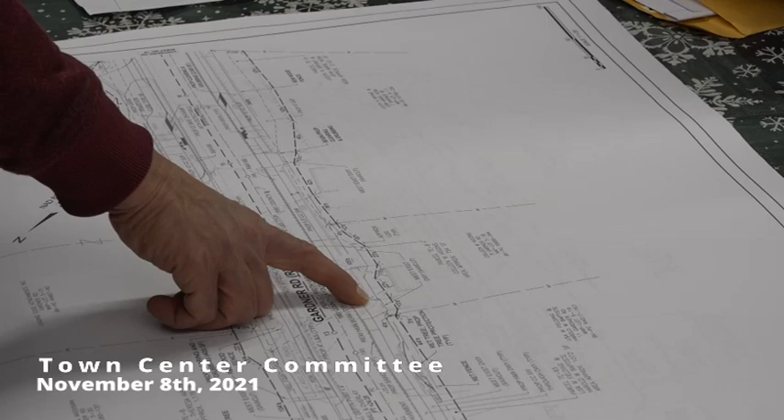This line is the limit that we would be reconstructing the driveway to. This side is a little bit less. Based on the scale of this plan, this is about 5 feet back from the driveway, so that's where that driveway would be constructed. Which means our new work would extend 5 feet into your property from the existing edge of the road.

Isn't much. But when you put a well in, you have to be so many feet away from the road. In this case, when I bought this house, the well was there already. My septic, I have a very small parcel, so they had to put it so many feet from the septic. But in this case, remember, the road is coming in away from your property.

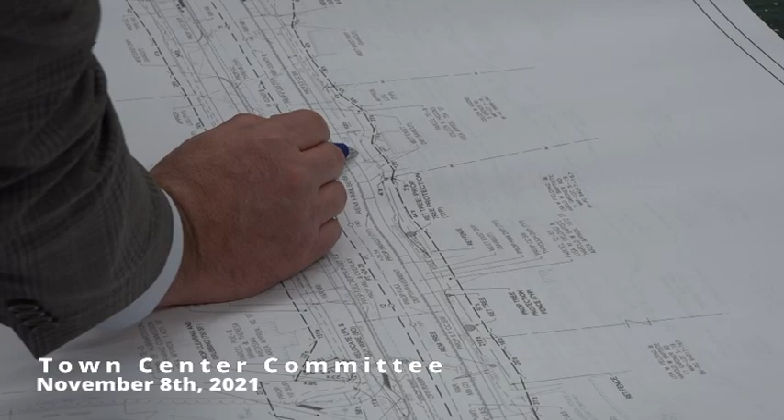The back of the sidewalk here is actually 5 feet into the road from the edge. So what we're talking about is impacts, but this is all your driveway. We're impacting it to reconstruct your driveway to here, but the actual new road is way beyond where it exists now. So we're actually bringing the road further away from the well, which hopefully is a good thing.

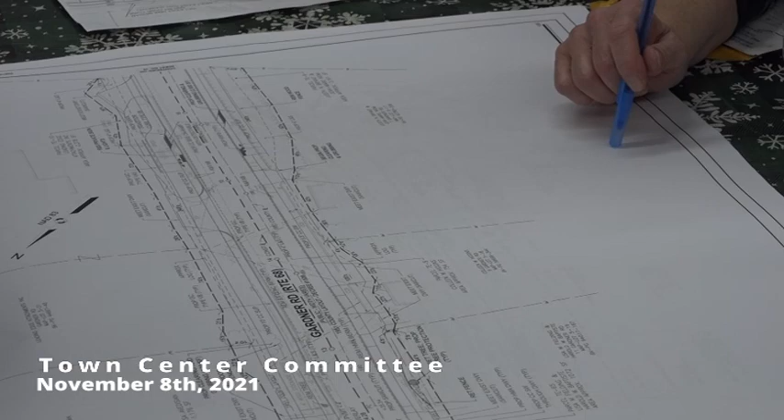Can't be bad. So the front of my house, I'm not going to really lose anything now? No, you're going to gain. My whole worry was, neither of us have much front yard, they have less than I do. My front door is actually on the side of my house, thank goodness, it's not on 68. I was just kind of worried how close that was going to be. Yes, you'll gain about 5 feet of green space.

So the sidewalk is actually going to be in front of their house and then go up, is that what you said? Starting way down there, on our side of the road? On your side of the road, yeah, the shared use path, it's really a wide sidewalk that bicyclists and pedestrians can use. That wide sidewalk comes up from Elm and Brigham to just in front of 7, and then it narrows beyond that to a 5.5-foot sidewalk the rest of the way.

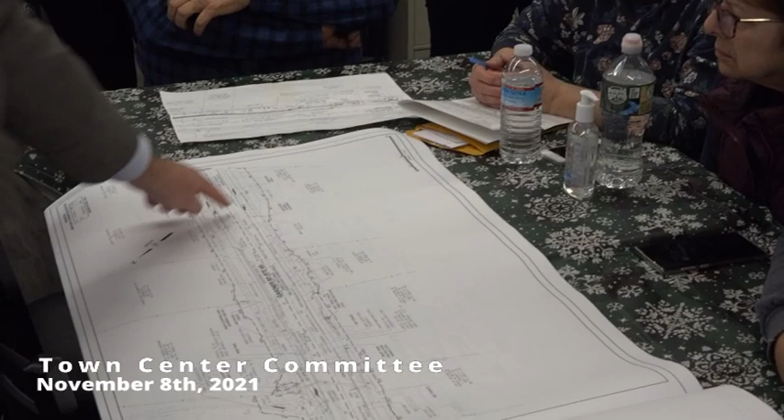And the 5.5 feet is because it has to allow for handicapped access, right? Yeah, that's just for pedestrians, the bicyclists aren't intended to use that narrow sidewalk. And where's the... right here. They only flash if someone wants to cross - they press the button, they flash for a relatively short period, allow them to cross. Oh, okay, so it's not like watching TV at night, there's going to be...

Not unless there's a lot of people walking. We talked a lot about that as a committee - do we get something that flashes every time a car passes or gets close? We thought that over time people would get fatigued and wouldn't pay attention anymore, like anything else, like smelling a farm - eventually you just forget about it. So the point is it only happens when somebody presses the button, so it makes more sense because people see it less, and it comes up into your view when you need to pay attention to it. It's a warning device.

It's not a stop, it's not a regulatory device.

So I have one more question. Last year we put in a gravel drive here. There's a driveway here and a driveway here, and then over here we had put a gravel driveway. But I did get a driveway permit from the town, so there is tar - they tarred it. So are they gonna, would they just... the curb opening is wider than this, so this is the proposed curb opening.

I'm not sure where that other driveway was, but we had it there - there's kind of a property line, so it's like from there, right, yeah, like right here. Would they be able to extend it? Because it's actually there, but we did it so we could get other vehicles out of the backyard.

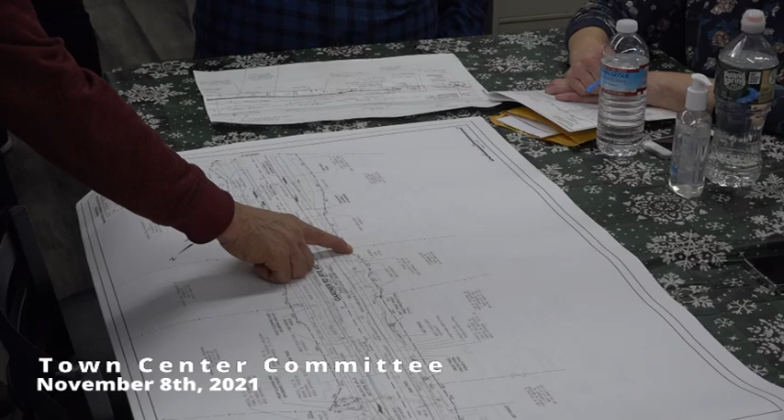Right, so that would actually stop here, and there'd be a portion of it that would be - is that grass? So where her paved area is here, it would be grass from here to here, and then a new sidewalk. So what you're saying is you'd want to extend the pavement further, and then cross the sidewalk to get onto the street, right? Yeah, but yeah.

Well, maybe I wouldn't need it, I don't know. The problem was we had trailers in the backyard that we needed to get out, so we had that put in. But it's pretty big, yeah, okay.

All right, no, I'm just wondering. Yeah, no, I hear you. I'm just looking at the plans myself, you know? I mean, we don't study these things either, you know?

That's why we're here. So we leave this with you and you're gonna take care of the extra curb cut? No, we have to apply to have that, to do it, a permit to do it, and then when they come to do construction, they'll see it's already widened, there's already a second driveway there.

The thing to remember, the goal is to have the plans perfect, basically locked in when it goes to construction, but there is some flexibility during construction - you could have a conversation with the resident engineer and say, you see what my driveway's doing here, it really needs to be 2 feet wider. They can adjust that in the field. We're trying to get it as close to locked in as we can before it goes down.

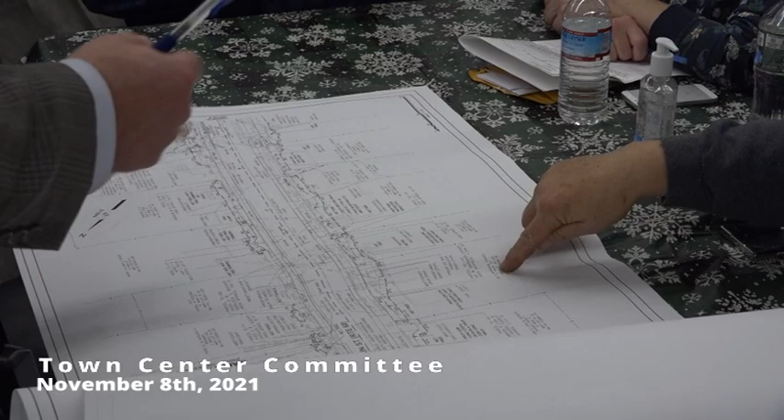Where are you at? 17. Do you have any questions? No, I've been listening to everybody, my questions are answered. Very good. Here, we got you, we got you.

So you see all here, there's the grass. Okay, so it's the gravel, the grass - there's no grass here in the final plan, right? It's the road, it's the parking, and then 10 feet to the side it's grass and then concrete walk. So there's curbing, grass, and then concrete walk. There is grass in here in the final plan - 5 feet of grass between the shared use path and the road is 5 feet.

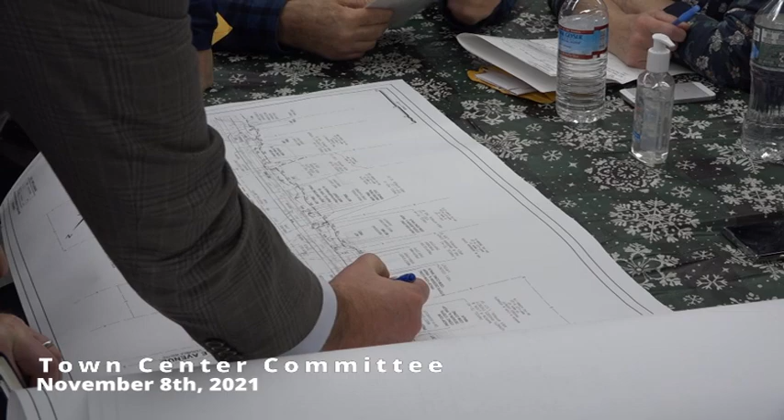I thought we voted it with no grass at all. No, we had to - MassDOT's comment was that we have to have it. Okay, so we voted something and they told us otherwise.

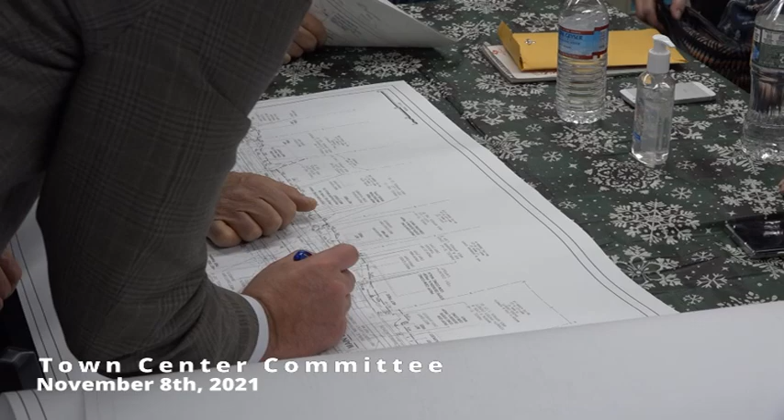I've got to get my stuff under the map. So where is the existing walk, and where is the future line? The existing back of walkway is about the same, but the walkway gets a lot wider.

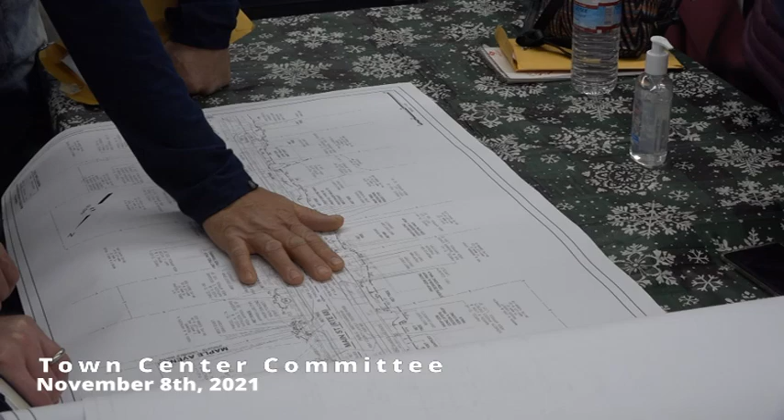But I think it'll be clear for everybody if you say this is the existing. What is this gravel here? This is not going to be gravel, that's existing, the grass here. So yeah, these labels are all, the lighter labels are existing.

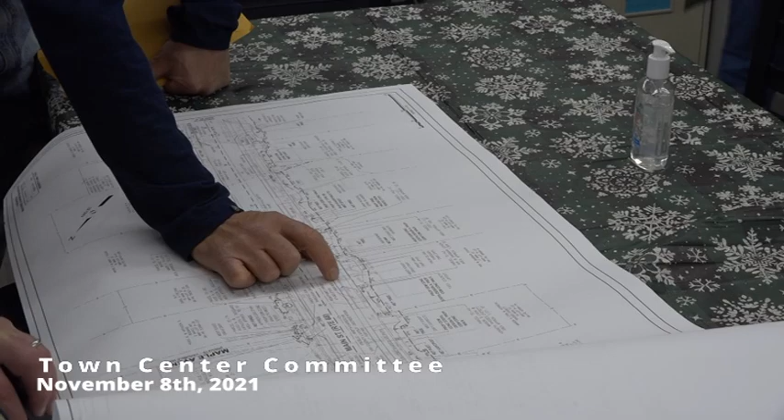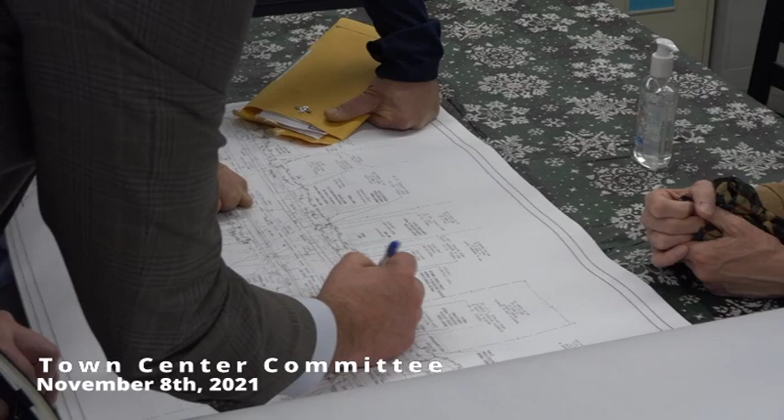The double line? Yes. And then this area is loam and seed, 4-inch loam and seed. So that would be between here and here, 4-inch thick loam and seed. And then back here, 10-foot cement concrete shared use path, so that's between.

When I'm really tired, I can see all these numbers cross my eyes. That's why we did this tonight. Many people had the same questions you did.

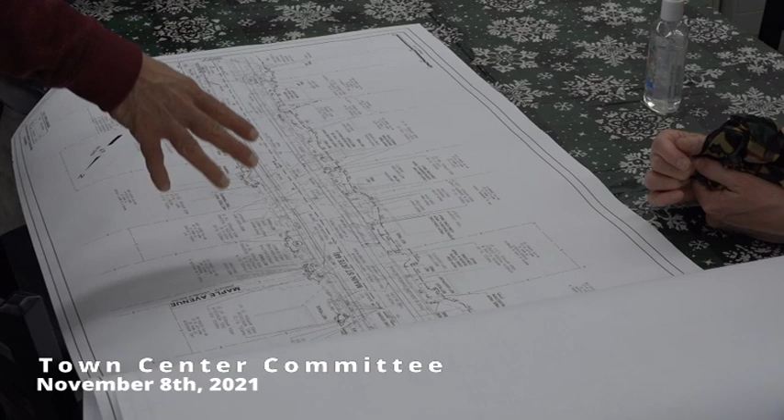I don't actually think what you said is a bad idea, but I don't think if we color coded it and wrote a bunch of notes on there, a lot of people would still understand. I think you need to be doing what you're doing with us now, which is, this is my house, what's going on in front of it, and all we have to do is show you 3 or 4 lines, and I think you kind of get it. Those 5 people just got it. So I think that's a beneficial thing of doing it tonight, because you can't, I still...

Now, even now that what Barbara, my wife, mentioned about our well is really close. I mean, it's our well around here. Yep, and this is...

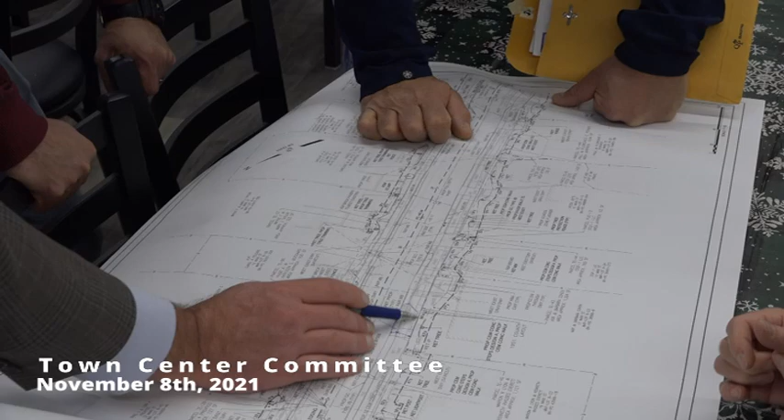Yeah, so again, this dash line here is the limit where we'll be putting new loam down and reseeding. There's not a significant grade change there because the back of walkway isn't really changing. But in order to tie the grade back in gently, we put new loam down and seed it, and then nothing from this line to that line. It's just that temporary easement.

So it feels to me like limited impacts, and I think the thing we ask people to do at times on things like this is put a stake out there painted orange of where your well is. That's the sort of thing that can be helpful, so that nothing happens to it that shouldn't. But it feels to me like what you just described in that area is very limited impacts.

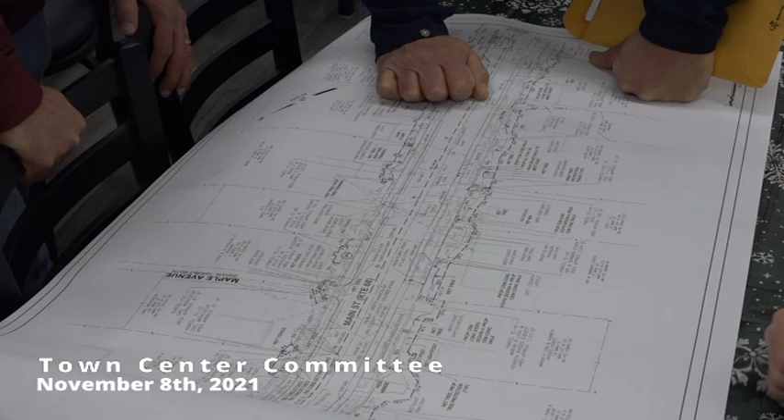So yeah, then it steps down from the back to your existing walkway, so you can access the shared use path. Will there be, during the construction period for this easement, will there be fencing put up there? Oh, no, there's no proposed fencing there. There's a short section of fencing between the tree and the work area. Oh, just to protect the tree? To protect the tree, correct.

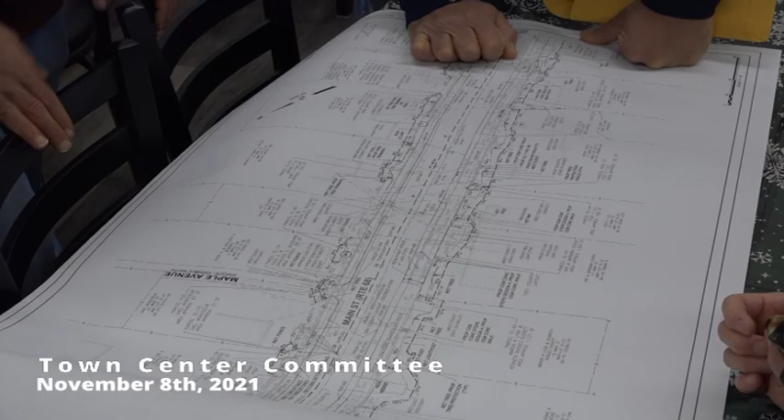But no, this project does not have that. You guys have seen, you've driven by projects before where maybe they have fencing, when everyone has a water line service, if they're ripping up water lines, everyone's got temporary water that's going along the road. Our project is much less impacted than sort of other ones like that.

It's going to be disruptive because it's going to be in front of your house, but you shouldn't be restricted on how you get in and out, besides a couple of very, very active days that are directly in front of your house.

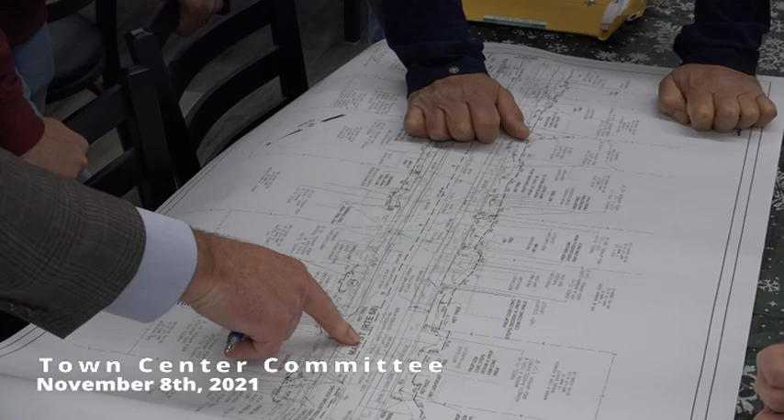And what's this gravel here? Existing, is that the driveway? So are you going to have access here, or is that going to be? This is a driveway cut, so it will be a driveway. Nia brought that up many months ago.

And then this is not in town center. I didn't say you did. I know the deal, it's all good. But it's the same comments that many people have had tonight. Yours is the first of... you were basically a trendsetter, because a lot of these are going to be going in. I can tell from the conversations here. And it's still fine, it's in the plans. No, I'm talking about the still.

Yeah, there are considerations that need to be made. These guys looked at what we had talked about, you as a private citizen sort of coming in. One discussion we had, maybe before you walked over, is there's a bike lane that goes down a portion that has to cross back over. If the extension of a driveway needs to go in a spot where it crosses the bike lane, maybe it can't. So it's not always a yes. But that's the sort of thing we have to have a conversation with each property about. But that's not everywhere, it's not like we're crossing all over the place.

Right, okay, so the double line is the curb. That's the edge of the sidewalk on that side. Yeah, that's the curb on the road. No, I got it.

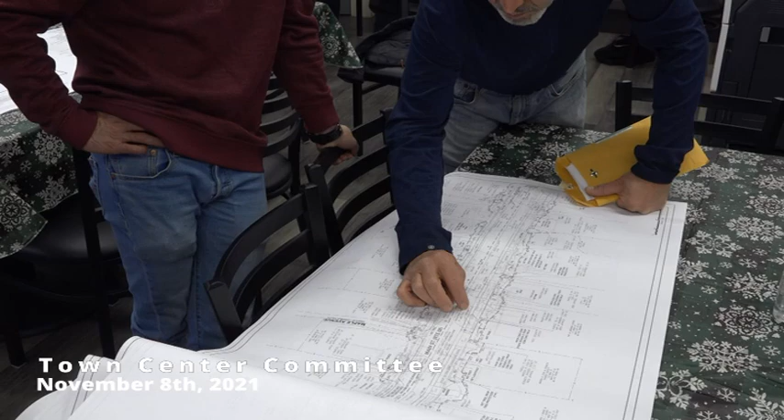I know, maybe grass will be green and the sidewalk is gray and the road is black. This is something very visual. I'm very visual, I'm working on a daily visual thing, that's the way I work. What is my understanding? But I also understand it can be very expensive.

Well that's not just it. Like if we made it green and made that gray, we might not be able to see the existing condition lines beneath it. So it's like you got to pick the best way to present it. If there are individual property owners, it would be especially helpful too to have those colored. Making the lines colored is easy, but shading the thing is more time consuming. Just changing the proposed line work to certain colors and adding a small legend, we can potentially do that for certain. But it depends if everything goes smooth and everybody signs it.

Need to be added, needs to be added, right? I understand, well, thank you very much. That's the drive force behind it. Just gotta get there, we're rounding the final corner. This is a big one though.